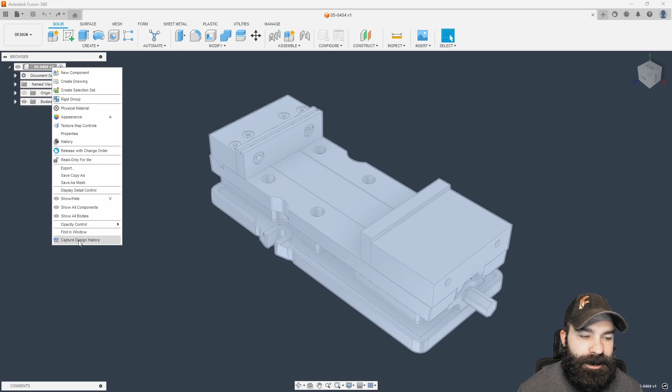Once you get your vise imported and set inside of Fusion 360, there's a couple of steps we're going to take to prep this model so we can turn it into our actual fixture with our parameters. The first thing I'm going to do is evaluate whether or not my timeline is on. I am legendary for forgetting about this, guys. If you do it, don't worry, happens to the best of us. So I'm going to right click at the top, assembly, and capture design history. Now I have that history bar at the bottom of my screen.

The next thing I'm going to do is evaluate whether I'm working with components or bodies. In this case, I'm actually working with bodies, which I'm going to convert over into components. So all I did was hold shift, pick the first and the last, right click, and converted those all to components. Now what I like to do is organize a little bit here.

So what I'm going to create is a brand new component, and this is going to be my stock. Actually, that's not going to be my stock—I'm getting ahead of myself. This is going to be the vise itself.

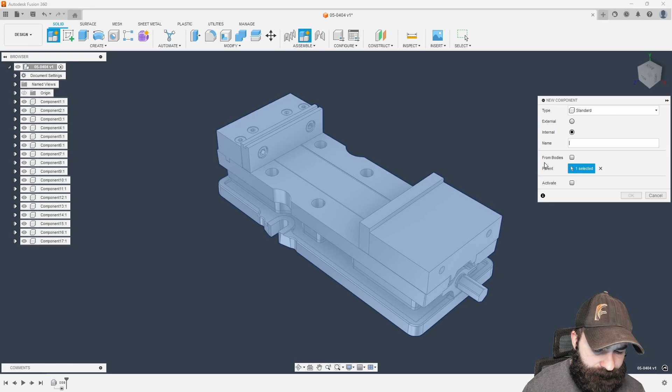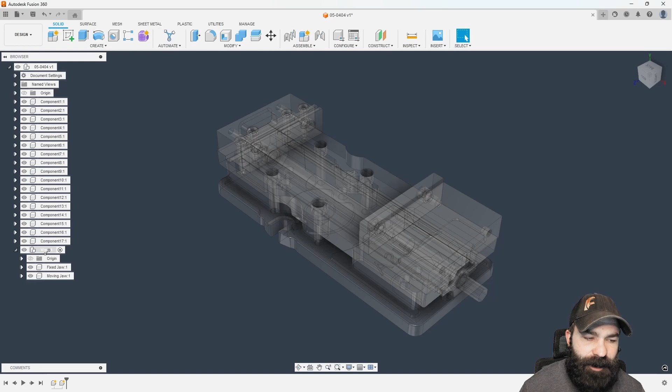From that, I'm going to activate it, and then we're going to add another component inside of that. I like to make one the fixed jaw. Then we're going to make another one, again keeping sure that that is active at the vise level. This is going to be my moving jaw. So we're going to have a vise, and then we're also going to make another component under the top level.

This is going to be our stock. We want our stock to basically control everything when we get to using this actual vise. Another thing I'm going to do is create one more level, again filed under that very top area. If for some reason you're having problems where it's automatically activating, keep in mind you can click this activation here, but we're going to go ahead and name this part.

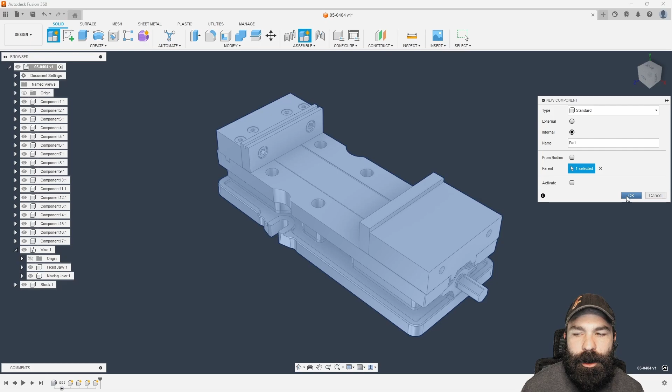This is where, a little later on, you'll see I can place my part right inside of here and possibly prep my setup utilizing the CAM workspace. So let's go back now and do a little organizing and a little house cleaning, right?

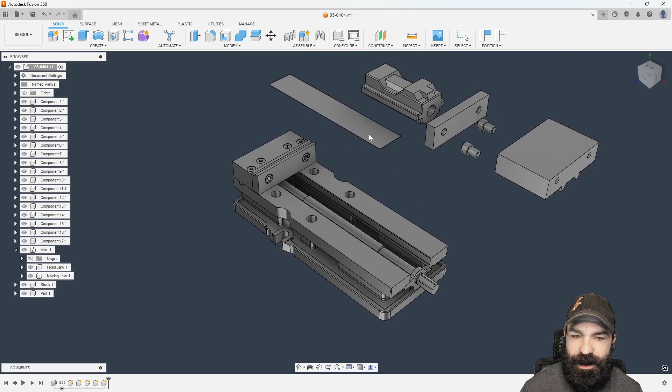Personally, this is how I approach this—I like to drag and move things out of the way. Now, if you can't drag and move different components on your actual assembly, the problem is because you never actually converted your bodies to components. So you're going to want to jump back a little bit and rewatch that area.

But now that I've grabbed all of the pieces in this example that I want to place nicely in my moving jaw area, I'm just going to hold control and double left click each one of these—I'll call them bodies here, but you'll see I'm highlighting my components on the left. Then I'm going to drag those components down into the moving jaw component folder.

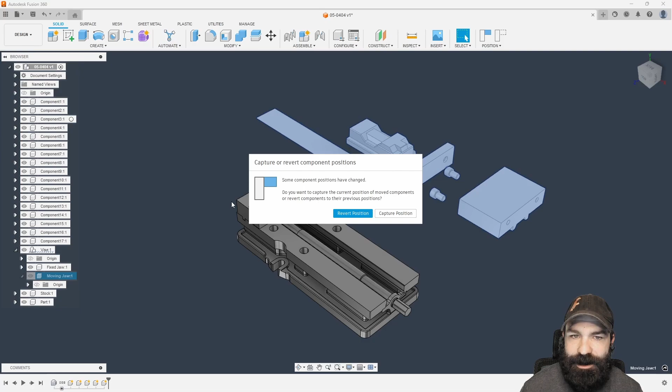This is asking me whether we want to capture position or revert. It's okay to revert this, and you'll notice everything snaps back super quick and easy. Now I like this because if I go back over on the left and click the eyeball for moving jaw, you'll notice my moving jaw has completely disappeared now.

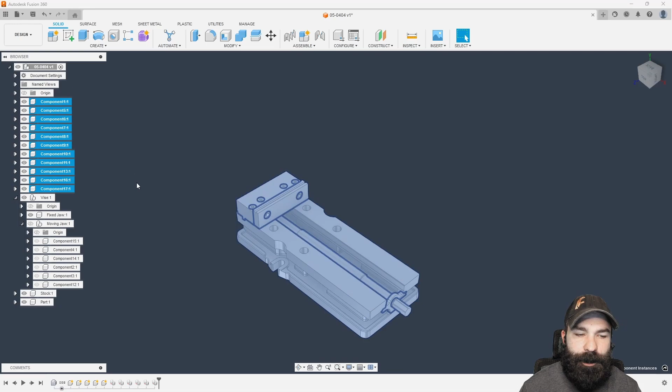So I can use that to my advantage. I'm going to go over here to the left, grab the rest of my components, and we're going to move all of those components down into the fixed jaw area.

To understand that we did that correctly, if I toggle off fixed jaw and toggle on moving, we should now have those two separated out. If I expand these, we're going to see all of these components residing in each one. Let's minimize those back up, because at this time we can leave everything on, or you could turn it off at the top level of Vise, since we're now going to make our stock box.

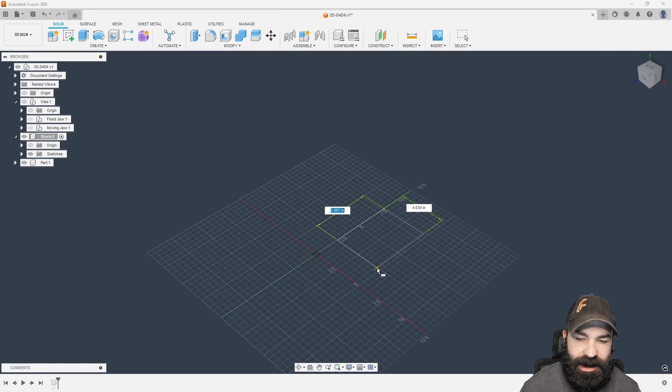So now I'm going to activate the stock component. Again, there's nothing in this component currently, just the origin. What I like to do is go ahead and create a box. It doesn't really matter what plane I sketch this on, because we are going to control this with parameters later. But I do recommend you punch in some generic dimensions so you know what you're changing later.

As you can see, I have 1, 2, and 3 set. This is a new body, and that new body has populated under stock. So let's start to... actually, we're going to pause there for a moment because we still need to create some parallels.

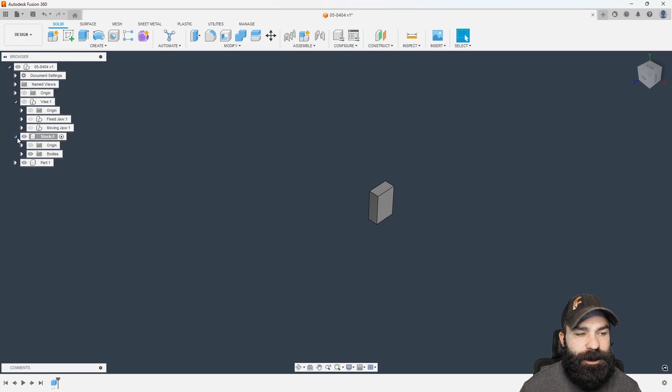So again, I'm going to turn off stock. In this case, I need a parallel for the fixed jaw as well as the moving jaw. It's up to you how you go about this, but a quick tip here is I'm going to go back to the top level and activate that, and create one more component, and this is going to be my parallels.

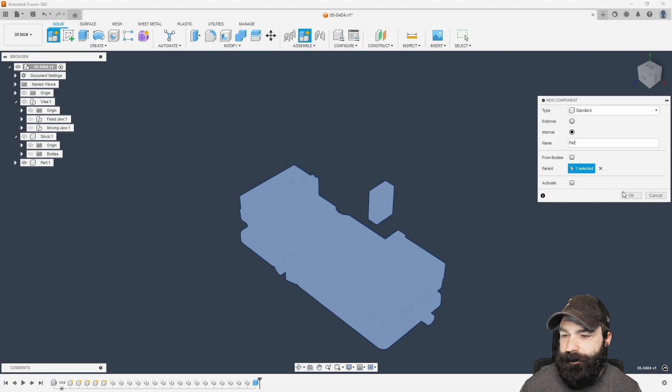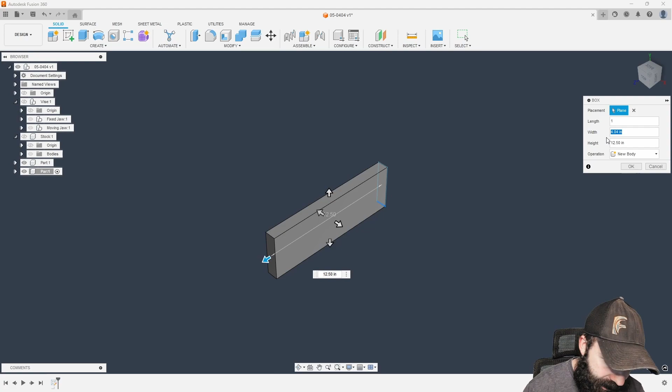What you're going to see me do here is, with the parallels activated, we're going to create another box. This box is going to allow us to create the shape of the parallel that we want. So again, very generically, we're just going to create the physical size of this and then go in and say 1 inch tall, maybe an 1/8 inch wide parallel. And lastly, I do want this 6 inches long because it's going to go on a 6-inch vise.

So this is where the cool kind of side of Fusion comes in. If we go back to our top level, I'm going to click the parallel, right click copy, then go to the top level and say paste. And this is where you all are going to make a decision.

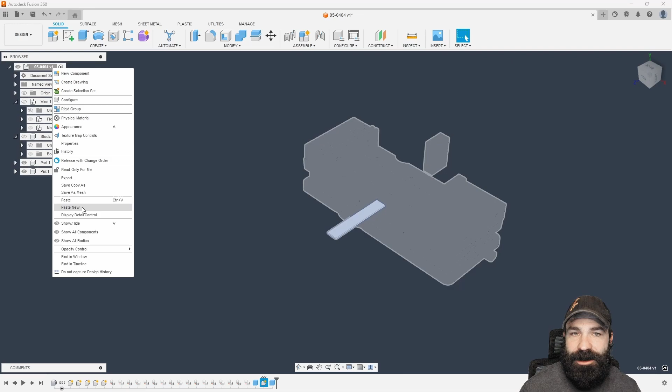Usually I put parallels in my machine as a matched set. Some of you may want 2 different size parallels, but for this instance, I'm going to paste, not paste new. If you want to be able to control each parallel separately, you would do a paste new. However, I want just 2 identical parallels.

And if you haven't guessed it yet, we're going to actually take those parallels and drag one into the fixed jaw, and drag the other one up into the moving jaw. So if we go ahead and get everything turned back on, you're going to notice that it's probably looking a little messy here because we haven't actually built our assembly yet.

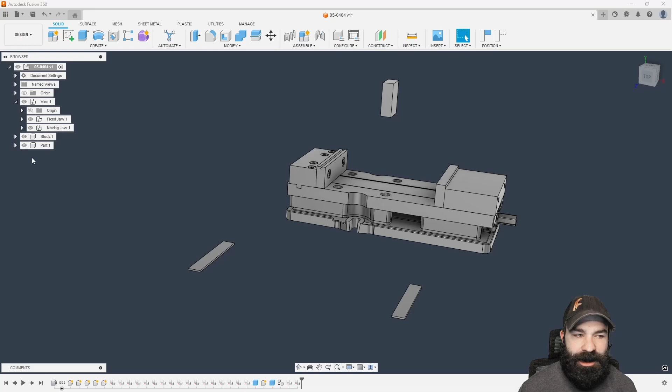And that's what we're going to do now. So the easiest way to build out the assemblies inside of Fusion is using the design tree to my advantage. Let's get my part and my stock out of the way. Now what I like to do is either turn off things with the eyeball, or right click and isolate. So I'm going to isolate strictly just the fixed jaw.

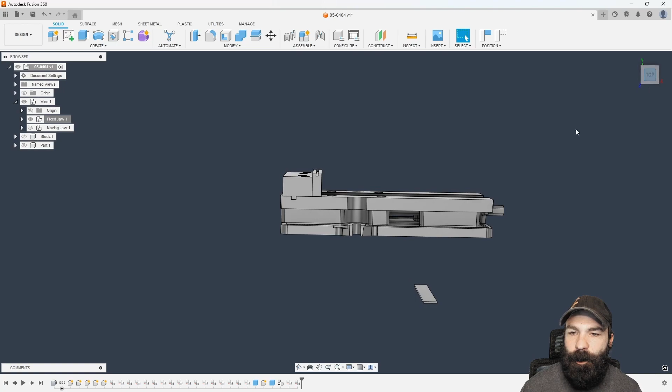And as you notice here, I actually have this little parallel still floating down there. It's more than okay, guys. What I'm going to do is go in and highlight everything with a window except that parallel, and with that I am going to create a rigid group. And now what a rigid group is going to do is we're going to go ahead and revert the position.

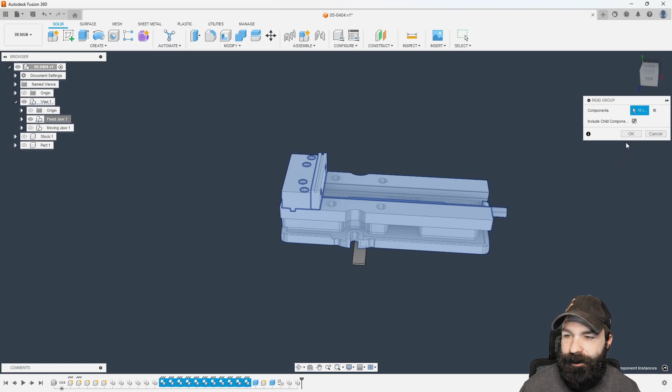It's going to take everything, and again, we didn't select that parallel, it's just hanging out there. It's going to create that all down into one solid piece. So as you can see, there is nuts and bolts on this assembly, but there is nothing really holding this thing together other than that rigid joint.

So not rigid joint, I apologize, guys. It's a rough one. It's Friday for me too.

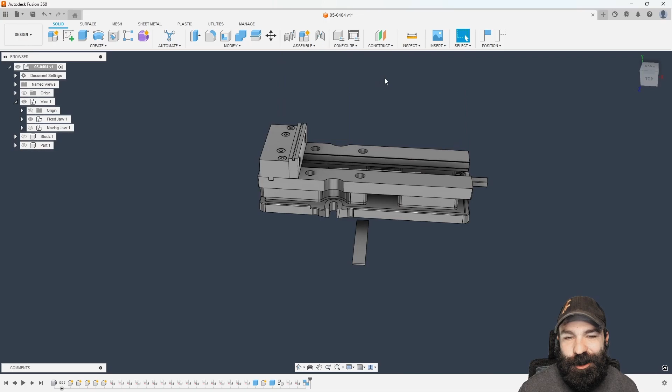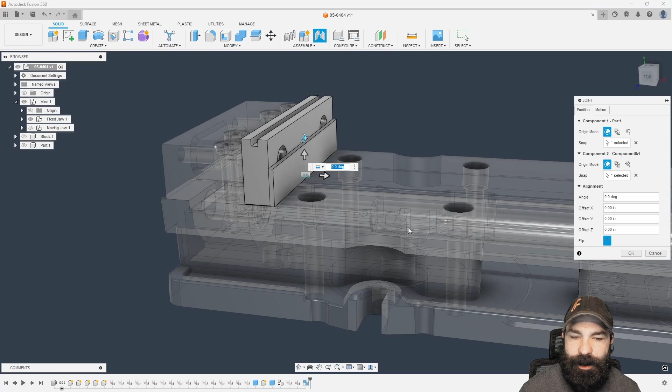So that is actually a rigid group, not a rigid joint. Now we're going to go ahead and revert that back. I just used my buttons on my timeline, and I'm going to do a joint between my parallel, using the bottom center of the side of my parallel, and taking it up top, going onto that face holding control and left click. As you're going to see, that parallel comes up and snaps into place perfectly. Awesome, it works exactly like I wanted it to do.

So now we can right click, and in this case, I'm going to unisolate what we've done, and you're going to notice everything snaps back. I'm going to go to my moving jaw, right click and isolate.

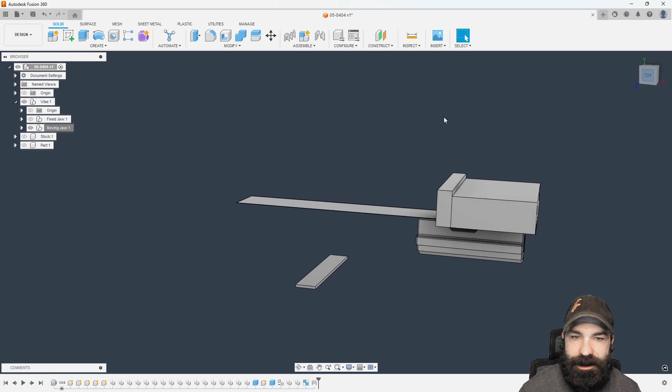We're going to basically rinse and repeat. Let's go ahead and in this case I'm going to do a rigid group, and what I'm going to do is highlight. In this case I can't highlight, as you're seeing, because I can't drop that window since it's asking me to pick things. So let's cancel that, and go in and drop our window. Again I'm avoiding that parallel temporarily. We're going to go back to rigid group and hit OK.

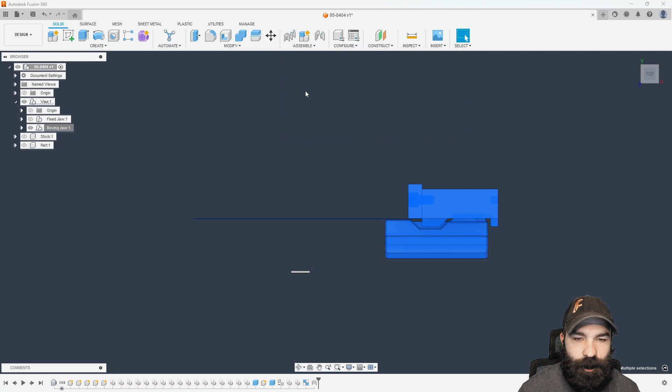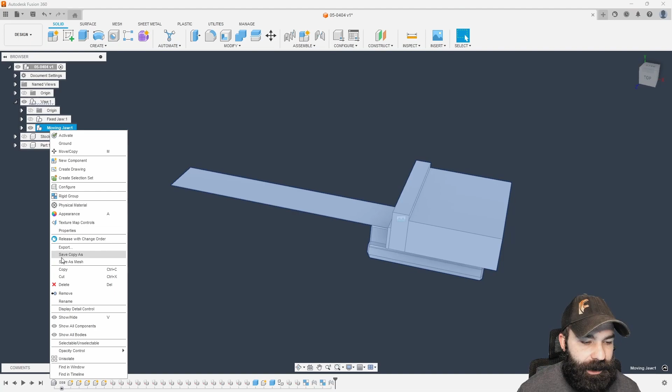Again, to verify that's all stuck together, I'm going to click and drag that around, and then we're going to revert it back. Again we're just going to do a standard joint. I'm going to use bottom edge of my parallel, bottom edge of my vise jaw, and now I can go ahead and hit OK.

Moving back over, we're going to go ahead and unisolate everything, getting our jaws all back and set in place. Now what I'm going to do is turn my stock back on because it's now time to put my stock in place.

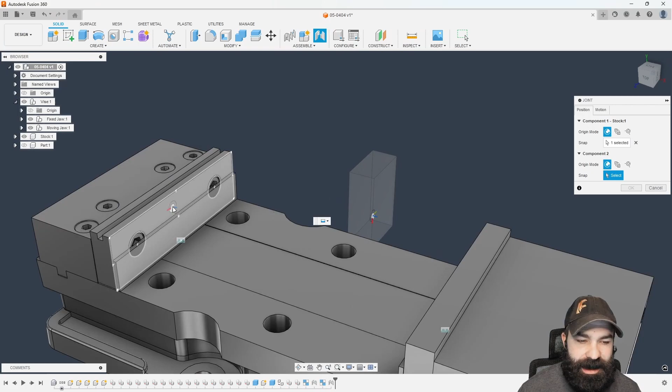So let's go ahead and do another joint. To make life easy on myself, I'm going to use the big side on the bottom. Again I'm using that method of putting my mouse on the face I want, holding control, and then going to the node. As you can see, that's snapped up now into place. We're going to do a 90-degree rotation and hit OK.

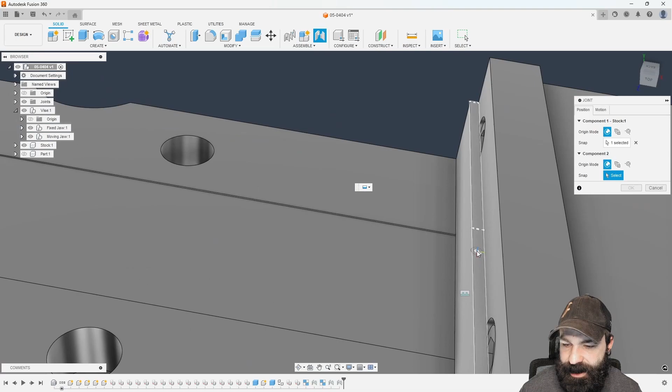Then again, I'm going to right click and we're going to repeat this joint one more time, going to the bottom side again, holding control, getting that node on the one side. Then I'm going to move over here to the other side, holding control. As you're going to see, those two are going to snap together. We're going to hit OK. And now just like that, my jaw has slid in perfectly onto my stock.

And now my stock is sitting inside my vise on my parallels. We even have our lovely little chip protector slid all the way through our vise, letting us know that we're in a good spot.

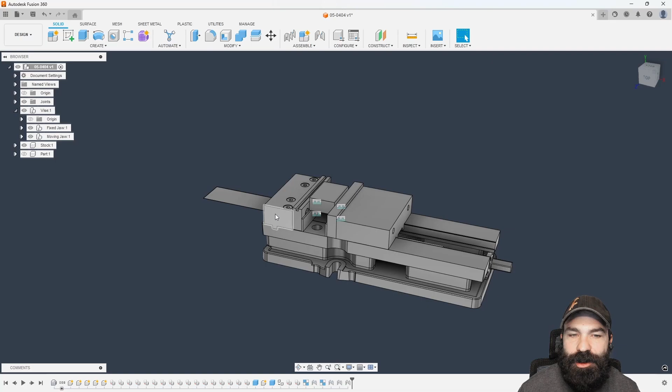So the last thing I'm going to do here, and this is a personal preference thing for all of you, is I'm actually going to add a joint origin, and I'm going to move my vise down to the origin of the assembly. So if I turn on my origin here, this is where I'm going to position it like it's in my machine.

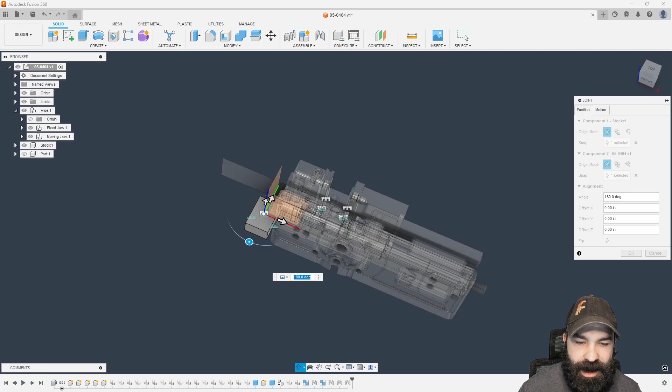We're going to go ahead and say a joint from the top dead center of my stock. And if I go down to my origin here, you're going to notice this thing's going to snap down. To start with, it is facing the wrong way, so let's go ahead and hit flip. I also know that the long side is my y-axis. Actually, it's not my y-axis, I apologize. I want the short side as the y-axis.

So I'm going to rotate 90 degrees. Again, this looks very confusing, and I understand that, guys, because you do have that inactive view of the vise, and nothing is moving except the stock. But as soon as we hit OK, you're going to notice everything just snapped down.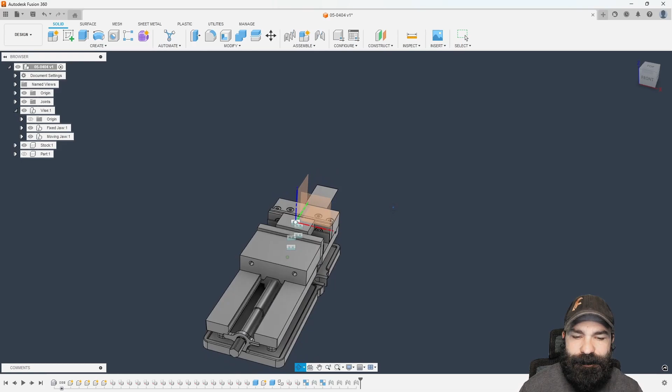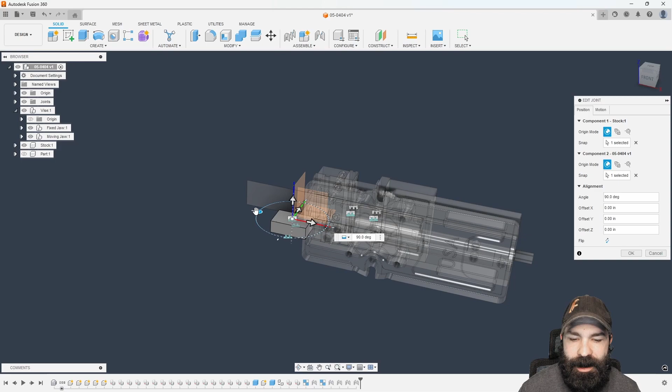Now, in my case, I lucked out, and my X positive is the right direction. However, if yours didn't, we could actually go back down on our timeline where that rigid joint we just created was, and instead of going positive 90, you could rotate 270, or go negative 90 to reverse what you have going on. In my case, we did luck out. Usually this doesn't happen. I don't know how I got lucky today. Somebody up there in the machinist world is looking out for me.

But let's go ahead and get our joints turned off. So we're going to go ahead and turn those joints off over here on the left, and you could toggle those on and off as you need. You could also, one neat thing here is we can go over here onto our drawing and pick the actual joint and hit V on our keyboard, and it's going to disappear the moment you click away. I'm also going to turn off my origin.

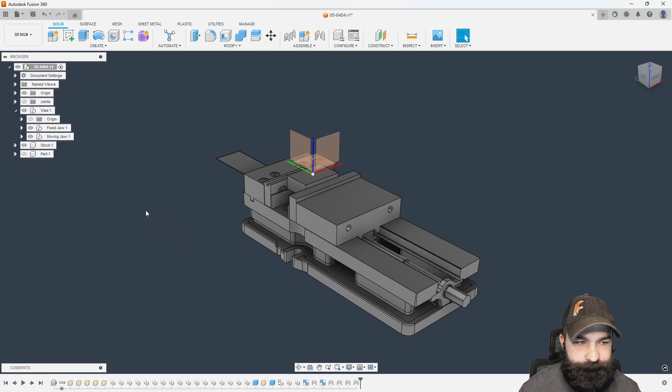And like I told you guys, we're going to go ahead and place a joint origin right here at the top center of our part. Again, we want to rotate this. As you can see, it does give us that green and red and blue line signifying X, Y, and Z. But I want to get that all in position so that in the event that I need that joint origin, it's a very easy reference point to grab later on.

We don't need to leave the joint origin on, however. So again, I'm going to go ahead and click that, and I'm going to hit V, turning it off. Oop, we got a little further ahead of ourselves. I'm going to go ahead and hit Control Z. Again, I'm going to pick that and hit V, turning it off once I click away.

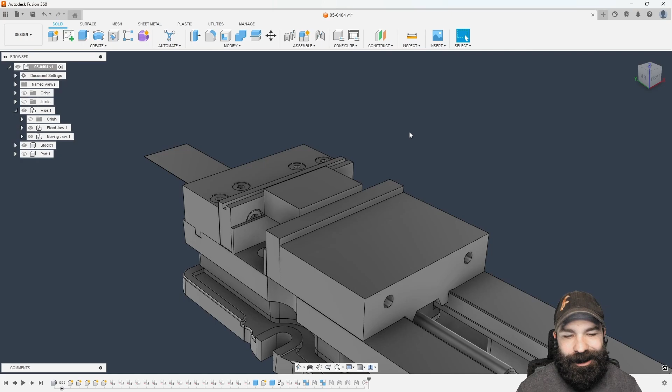So let's go ahead and start setting up our parameters to control this now. In my opinion, it's much easier to build out what we want and then add the parameters second, making our lives much easier. So if we go into our parameters, you're going to notice that this is going to kind of line up with our tree over on the left. And what that is going to allow us to do, maybe I should expand that out just a little bit more.

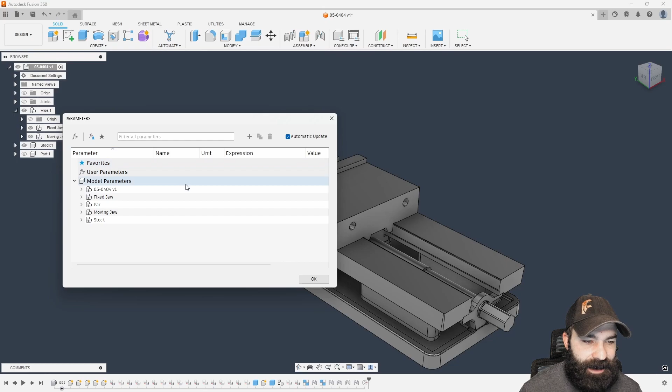And let's get these categories. So we do have our fixed jaw, we have our parallel, we have our moving jaw, we also have our stock. So let's start with stock. In the case of my model, let's see if I can position this the best way possible so we can see this in real time. I want to be able to control my stock size, right? So I do have this stock primitive, and we have the 2, 1, and 3. Noticing these are out of position.

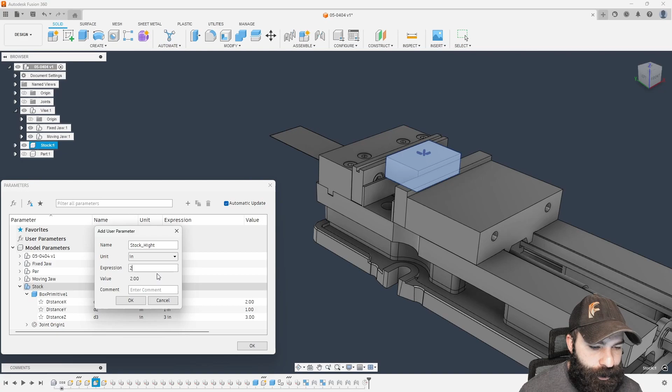So I'm going to create user parameters here. We're going to go ahead and hit the plus sign, and this is going to be my stock height. And again, you can't do this all as one, it's got to be one word, so you can't use spaces. And now I'm going to set my stock height to 2 inches. And now you're going to notice that user parameter has populated up here at the top.

So if I look down below, this dimension 2 is set to 1 inch. Now, if I start to type stock, you're going to see stock height come through. I'm going to hit enter, and just like that, the height of my stock has changed. So let's go ahead and do this a few more times. We're going to add another parameter. This is going to be stock underscore width.

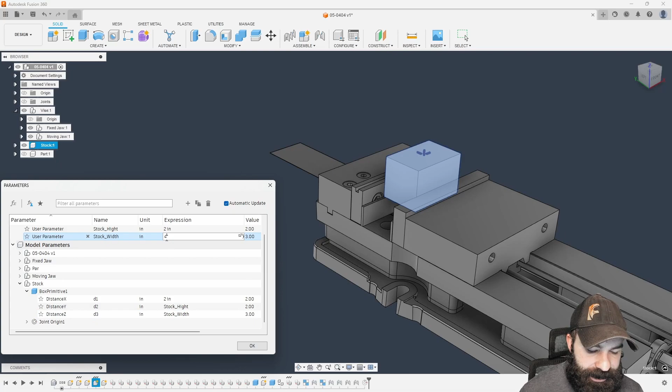Let's go ahead and bump that up to 3 inches. Again, if we go down below and type in stock underscore width and push enter, nothing has changed because that dimension was correct from the get-go. Now, if I change it up here at the top, this is the cool thing. If I now say 4 inches, notice how that actually expands out.

You guys don't have to use my terminology by any means. You can come up with your own. For the last one, we're going to just say stock underscore depth, and this is going to now be, let's go for, I like 5 inches. Not the best way to hold this part, but I think you guys are starting to get the point.

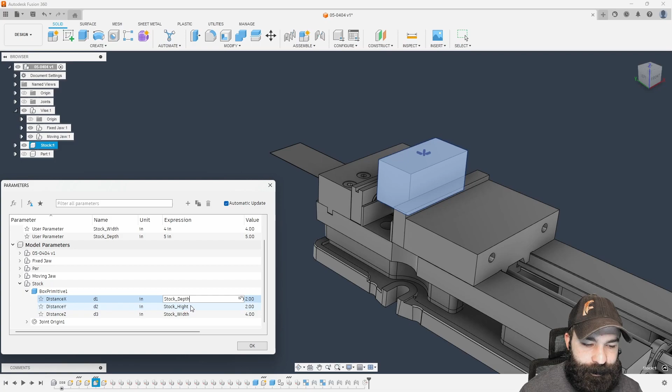So again, we're going to start to populate stock depth. I hit enter, and just like that, my vise has opened up to accommodate that stock. So if we go through here and change this to whatever we want, you're going to see in real time that this updates the actual physical body that is our stock. And how that works is based on those parameters.

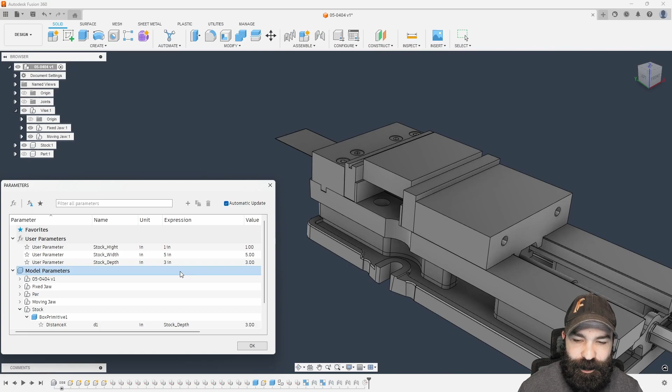So now a few other things I may want to update is the ability to update the parallels. Again, this is your personal opinion on this. I'm going to go ahead and create a parameter for my parallel height, given my parallels are all the same exact thickness of an eighth inch.

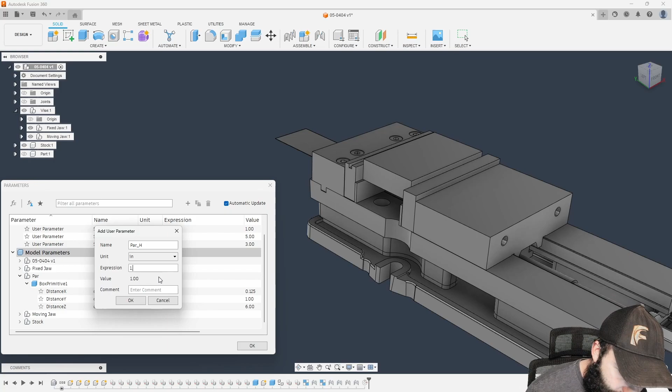Maybe sometimes you use much smaller ones based on what you're machining. We're going to keep it very basic, so we're actually going to go to a 125 parallel. And again, I'm going to go down to where that 1 inch height is, and we're going to type in Par_H, in my case. As soon as I click out of there or hit enter, you're going to notice my parallel height changes.

And to see that a little closer, let's go to a 0.5 parallel, or let's take this all the way up to a 1.5 parallel. And just like that, we're now upping the ante and now able to control everything.

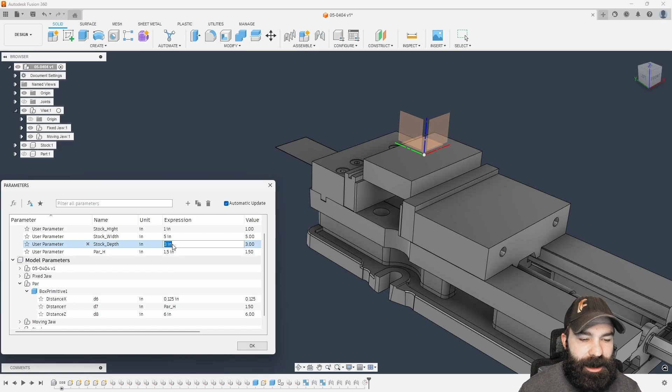The nice thing is if we look at that origin up at the top, no matter what I type in here, it doesn't actually affect what we have going on with that origin location. This is going to be very valuable if you're going to trigger this to use for your setup in your actual CAM workspace. So let's go ahead and hit OK.

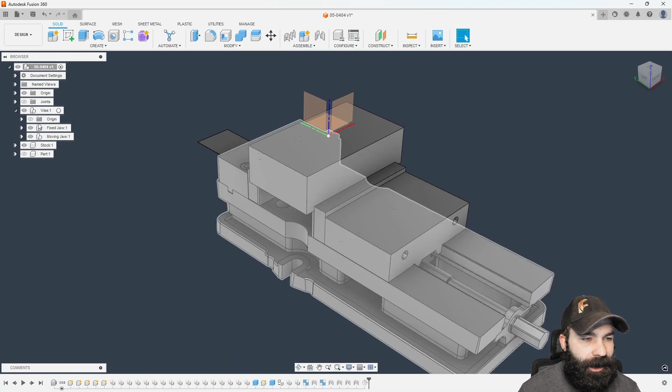So give this a moment to think. We're going to go ahead and get squared back up to everything going on. I'm actually going to turn that origin off. And now I like to do a couple of simple things just to make this a little bit easier on the next person using it.

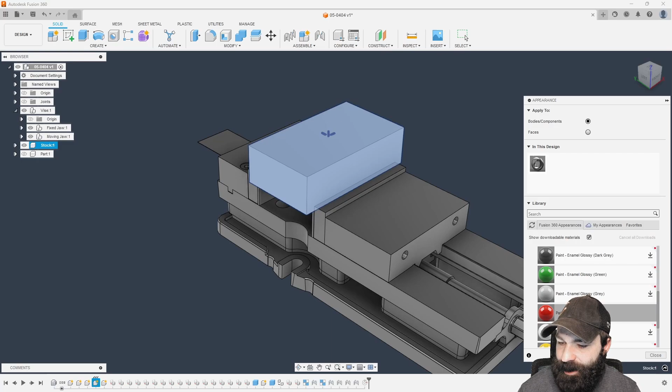One, I'm going to go ahead and change the appearance of my stock. I'm going to go down to paint. I prefer a nice glossy color like red, and we're going to download that. With that being said, we're going to apply red to that body.

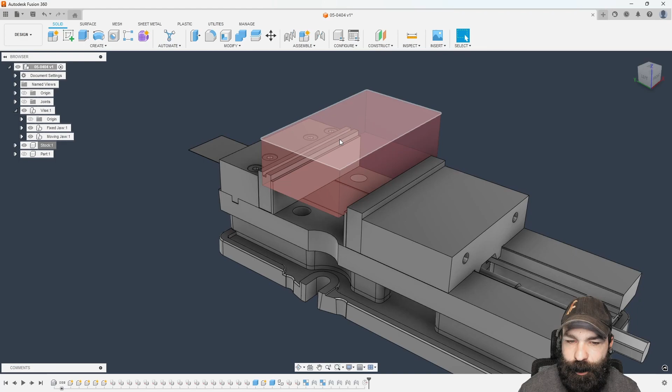Another thing I'm going to do is right click that stock again, and we're going to go down to opacity. I like to bring it down to about 40 or 30 percent, depending on what color I chose. I might take that down just a little bit further to maybe 20. The idea is I want to be able to see my part through the stock here, making my life much easier when it comes time to do my setups.

So now let's go ahead and jump over to the manufacture workspace and prep our setup. First I'm going to save -- always want to save your file so that you don't have any issues with it. I'm going to go from design over to manufacture, and now I'm going to create my setup.

So let's walk through this setup. First and foremost, my model orientation, and this is why it was so important to put that joint at the top in the middle of our stock, is perfect. So according to the world and according to what we have here, we are oriented correctly.

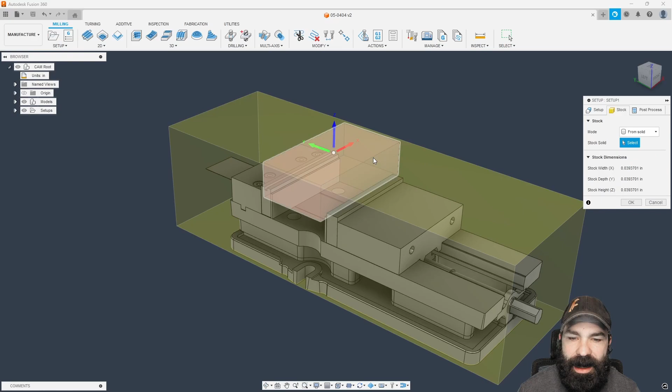Now what I need to do is define a few things here. First, it's asking for a stock box point, but as you can see, the stock box is crazy. So let's go ahead and go to the stock side. I'm going to say from solid, and I'm now going to pick that red box that we've created.

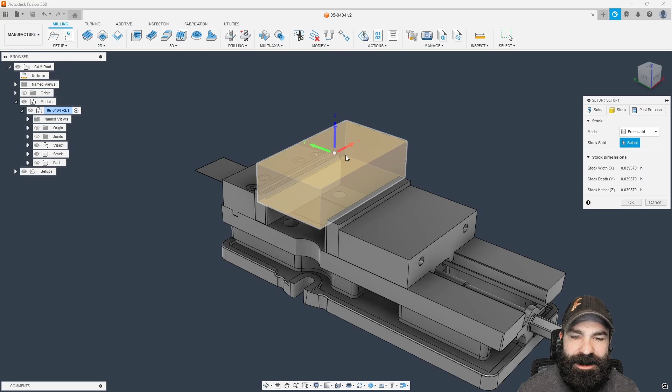You're going to notice how my XYZ coordinates snapped to dead center on what I'm doing here. One other thing you can do, if you needed to, is expand out your design tree, which is why we made stock its own component, so we can get to it as easily and fast as possible. I could go to stock over here on the left and pick that.

Now, my model that we're going to work on, this is always fun. Before I jump to that, I just want to let you guys know you can move this stock point to wherever you want based on what you're going to use for your work offset. I'm going to leave mine top center because I'm also going to front load my probing cycles here.

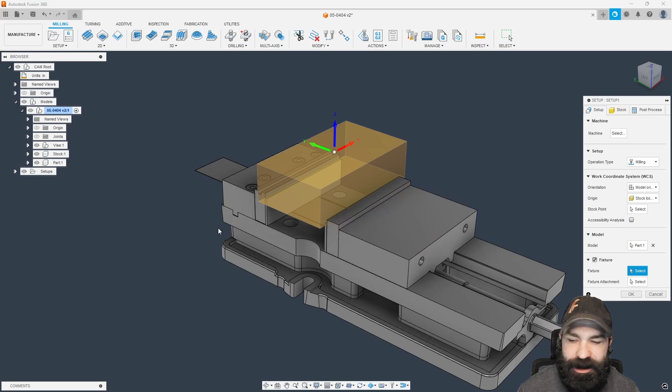Moving over to the model side of things, I'm going to select the part component and turn that on. Although it's an empty component, once we get to the point of dragging and dropping our part in, you're going to see how valuable this is. From here, we could also add a fixture if you wanted, and as you can see, it's very easy to grab my entire vise. If I wanted a fixture attachment point, we could go ahead and add that in.

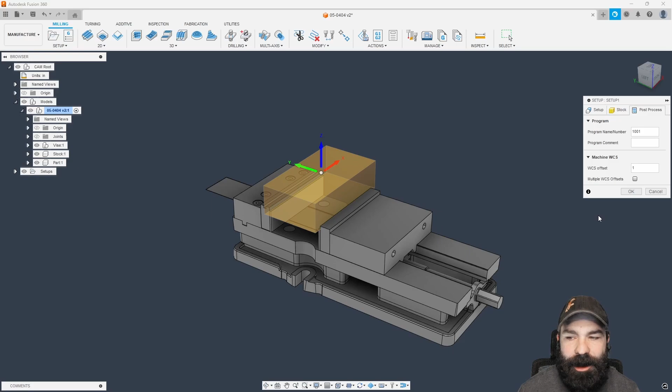We didn't add one on this like we did in the 5-axis world—not a big deal, guys. The great thing is if you use a machine, you could use a selected point. But this is about all we have to do for prepping this for whatever we plan to do. So in the future, when we come in, select our machine, run through, modify our program for whatever we want, and then we could even add in our different work offsets. So we can go ahead and hit OK.

Now let's give this a couple of tool paths. Like I said, we're going to go in and add our probe WCS. I'm going to select my probe—luckily I have this nice 6mm probe in my library. And my geometry is going to be based off my stock.

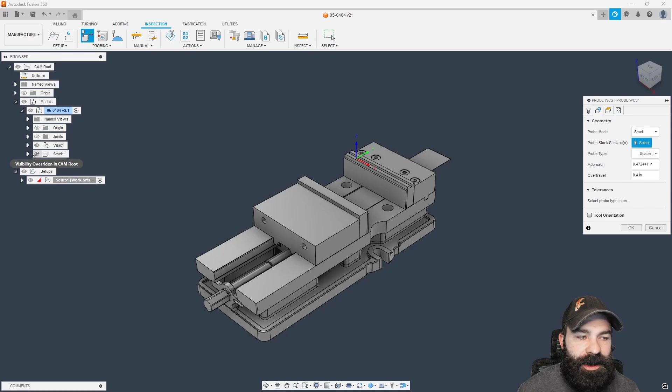As you're going to notice, my stock isn't currently here. Well, we can turn it on over here on the left, and then we can go in and select that actual stock. But because we're using a solid body, it doesn't think it's actually stock as we defined it. So this is where we go back to the model side of things and pick that top face—again, because this is a modeled stock, it's not created in the background of Fusion as stock.

Now we're going to do our XY rectangle, or as I like to do, my Z face first. Then, pro tip here, you can go ahead and duplicate that—double click on it to get back into it. And now let's go ahead and go for our XY, again aligning us on center.

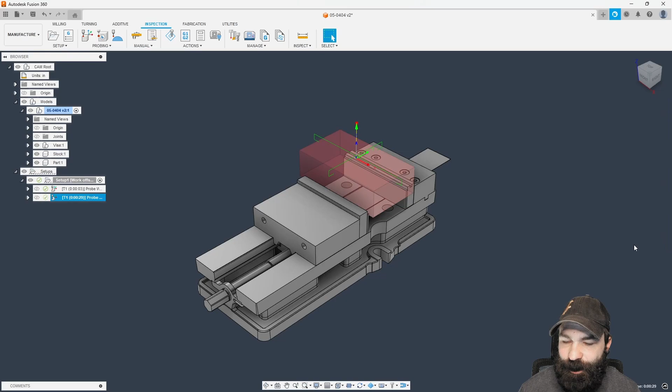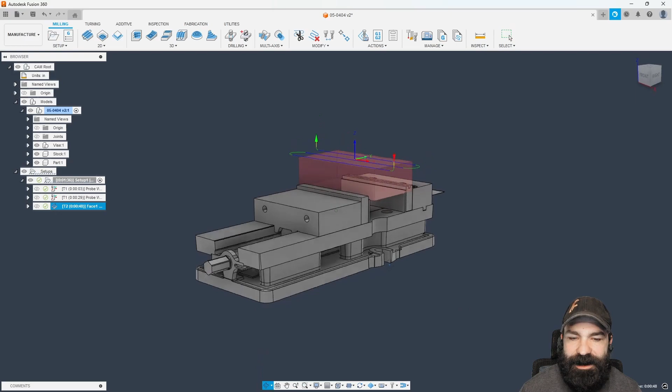Before I finish this up, you guys might add in all kinds of crazy roughing cycles. For me, 99% of the time, we're always going to face off the top of that part. So I'm going to go out and grab my lovely 2-inch face mill and add that in. As you can see, we're now facing off the top of that stock, based on our part file, and we've already prepped everything for our machining from there.

So let's go ahead now and take a look at how we can use this. Again, we're going to save this and jump back over into our design table, and as you'll see, this file is actually being saved. One thing I'm going to do is rename this file.

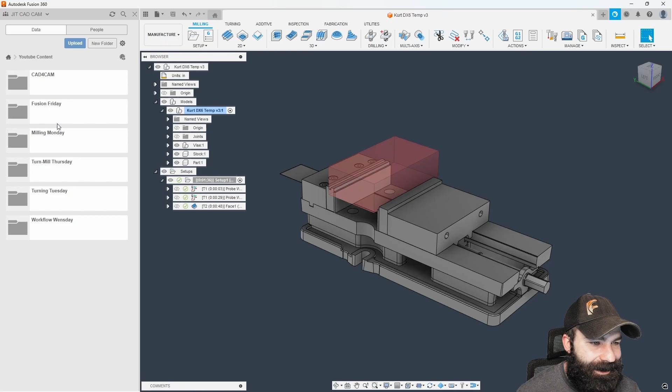This is going to be my Kurt DX6 template—as you can see, I can't type, which proves out how much of a machinist I am. Now let's go grab a part that we can use. So we're going to go back to our other file formats here, as you guys see, I have a lot of different video content that I'm going to use.

And just like that, I now have my vise. I now have the part that I plan to work on. So let's get that opened up.

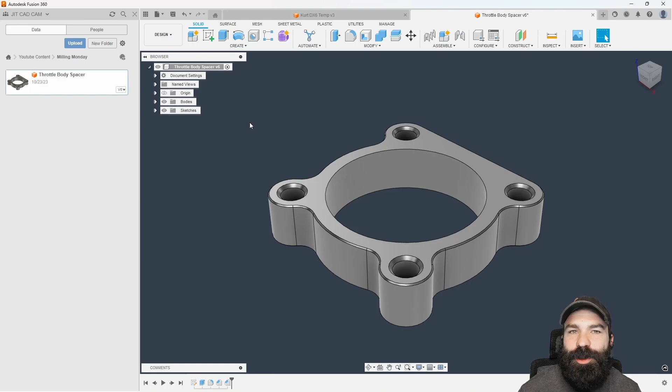Again, we're going to go ahead and clear out this file, since I failed to do that before this demonstration, and go back to the design side of things. So it's really up to you which way you all plan to use this. What I personally would do is have my template file, pop it open real quick, do a file save as, and label this — in this case, this is my throttle body.

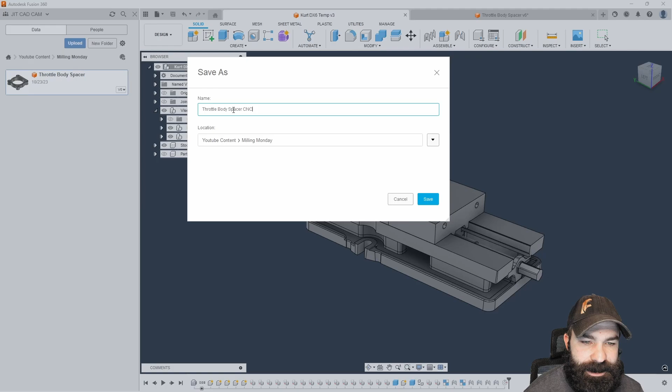And this is going to be my CNC file. As you can see, we've now saved that, and it's populated here. I'm going to take my throttle body spacer and bring it into this file. However, as you can see, if we hit active on the part first, this will help you guys a ton — we want to make sure it's visible.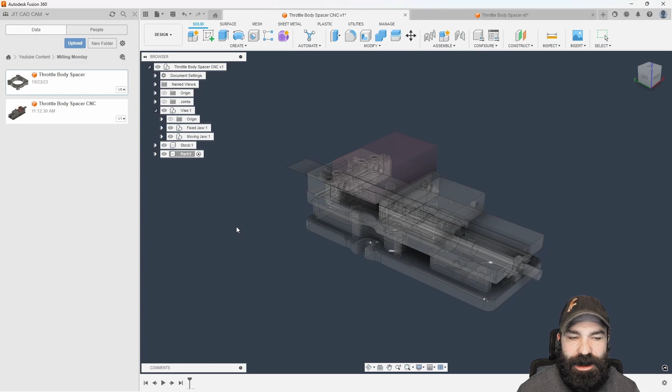I'm going to just drag and drop that in. What you're going to notice is it jumps directly inside of Fusion, and it automatically places it under part, all while keeping everything linked. Again, just makes my life easier to set this a little higher and out of the way. But let's go through now and actually get this moved into position. Activating the top level just makes this a little bit more visual.

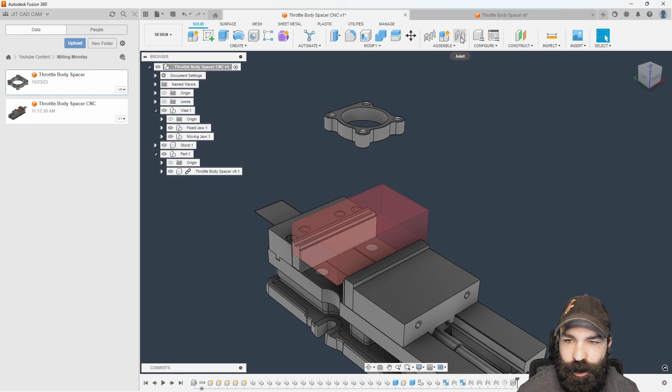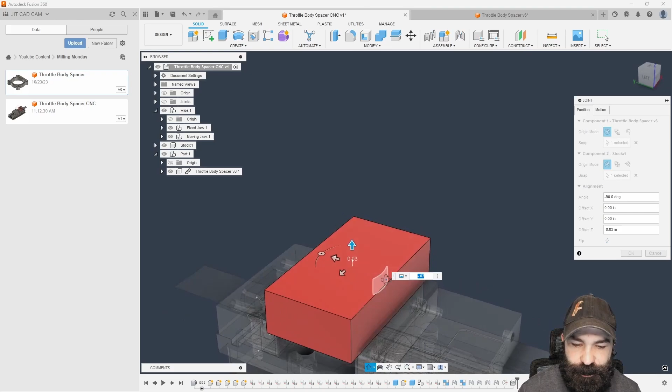We're going to go ahead and do a joint. I'm going to put my mouse on that top face, grabbing the top center of that body, and place that top center on my stock. Oh no, we're upside down, not a big deal — go ahead and hit that flip arrow. I want to drop it a little bit, so I click that Z axis, and let's say we drop it by 0.03 to give us plenty of room for facing, and we hit OK.

As you can see, my part is now inside my stock, and my stock is oversized, which is not a big deal because we can now adjust that stock based on parameters. So let's go up to the top — we're going to say modify parameters.

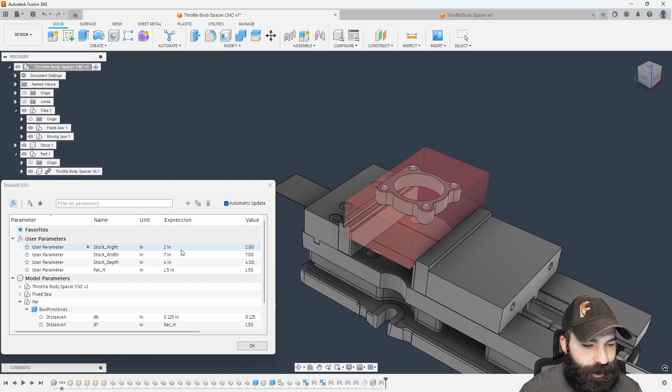Again, if you guys don't remember this, we set up our own parameters to control this. So my stock height does not need to be 2 inches — let's go ahead and look at what 1 inch does. 1 inch is pretty good. However, I'm not really clearing my vise jaws, so maybe we go to a 1.625 parallel to get us up a little bit higher.

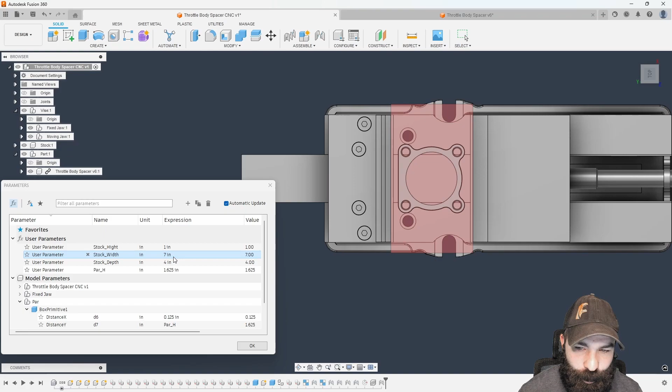That's looking much better. Now, based on a few of the other directions — I apologize — looking across that x-axis, 7 inches might be a little overkill, so let's go ahead and take that down to like 4 inches. As you can see, my part is now fully contained within my stock, and my stock is set as needed.

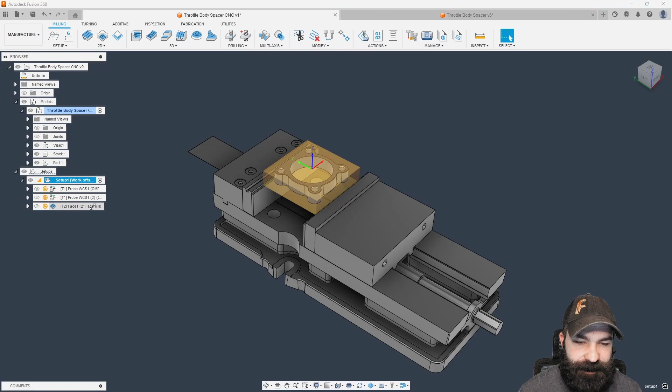So what I'm going to do now is jump back over to the manufacture workspace. Now, in the manufacture workspace, I am getting warnings because things have changed, and that's more than okay. We're going to go ahead and hit Control-G. And just like that, we've now fixed our Z-axis probing.

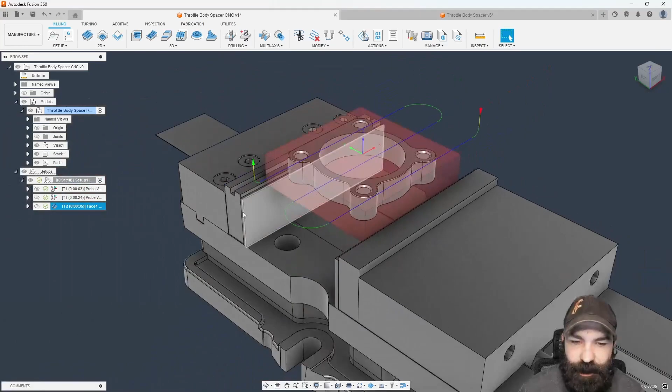We have now fixed our XY probing, and lastly, our facing cycle has come in and is facing off our part based on our model height inside of our stock automatically. So this is a great way to improve your guys' performance when it comes to machining your parts.